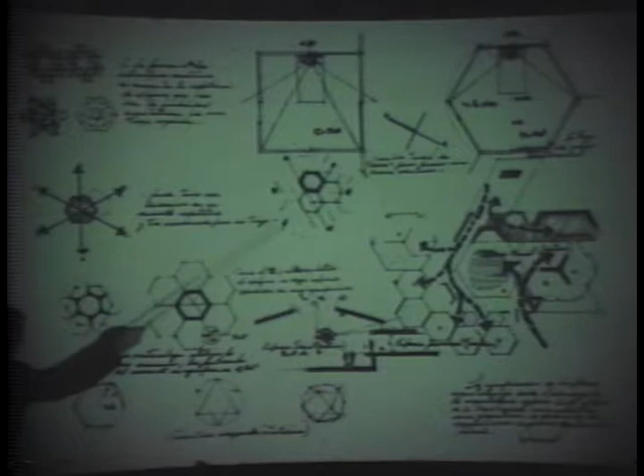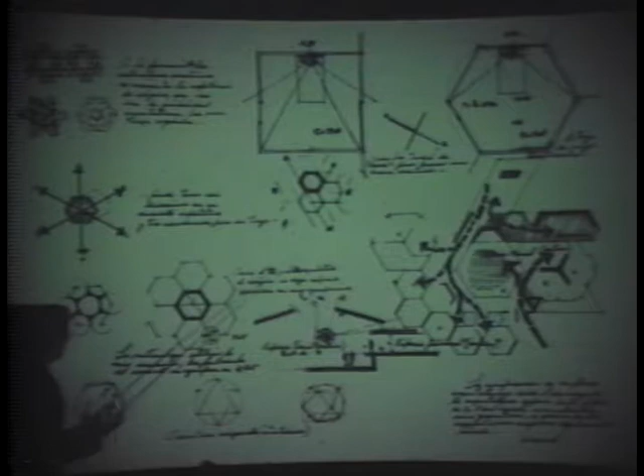This is a comparison of a room with the same surface, and how the hexagon is more wide, it looks more ample because it's more wide and has more length, more profound. The hexagon has 3 lines, 3 directions to move in groupings. So it's more organic, and for some problems, it's very useful.

Here are the circles, how they make hexagons when they join together, like the panel of the bees. They were circular millions of years ago, and by compression, they make hexagons. Hexagon is one of the forms, triangular hexagon. It doesn't leave empty spaces like the circle.

This house is all related with models, hexagon models, with a central swimming pool.

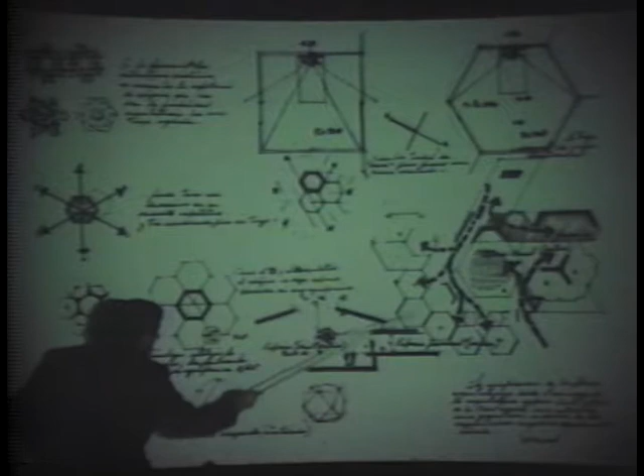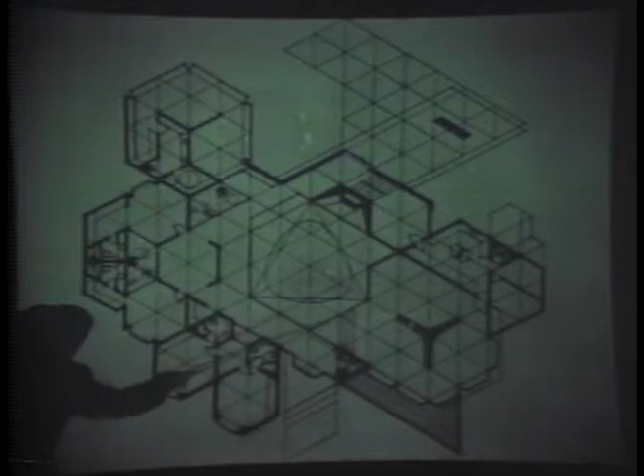This is the plan of the house, all the modulation. This is bedrooms. This is the social section. It has a dome here. And this is the bedrooms of the children, a master bedroom, a kitchen, dining room, and social room.

It's all done with structure iron, structure wood and stone. It has 3 levels of roofs to see the outside garden of a park. The garage. This is the swimming pool. This is another level of communication for the bedrooms. This is another window, another kind of level, and the dome.

The next house is very particular. It's a man who asked for a competition for a house. He asked 4 architects for a project. And he invited me first, we had a talk.

This man said, you want a drink? And he sat down this way, with a drink like this. I was very surprised looking at him walking. After 2 drinks, he walks that way. And I presented him a project.

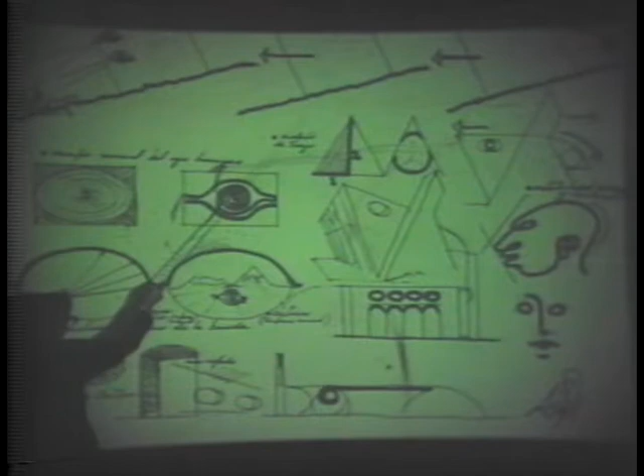And in this trace it has arcs and elliptic windows, because the elliptic window is really the window more functional for the eye. We don't see in the square, no. Our visual field is ellipse, the polychromatic visual field.

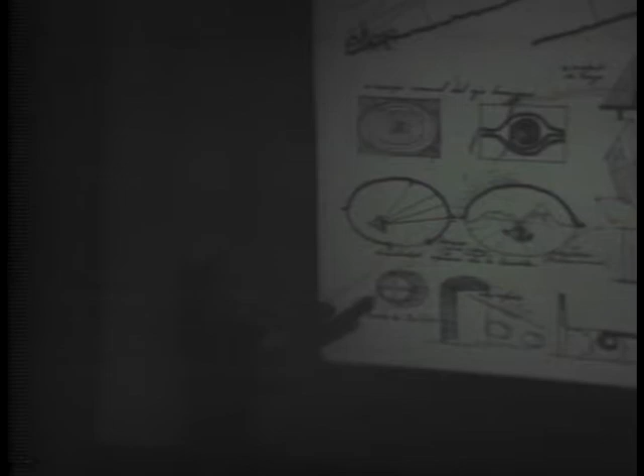And it has all in the triangles, has arcs, which have two dualities. If you see an arc like this, it's a cover, it's covering you. It's a passive way to have a look of an arc. If you look at the arc this way, it's active, it's a shoot for a space.

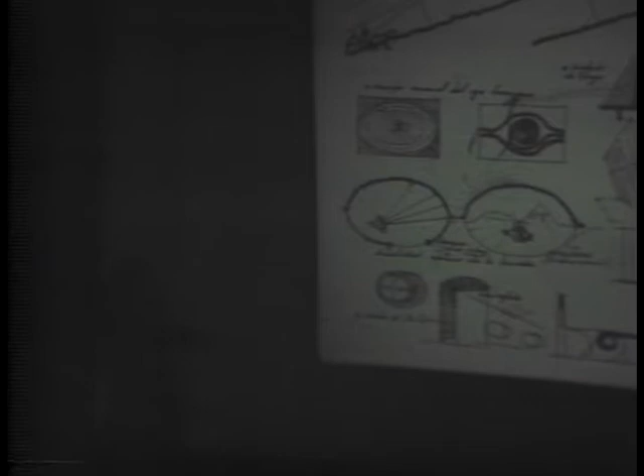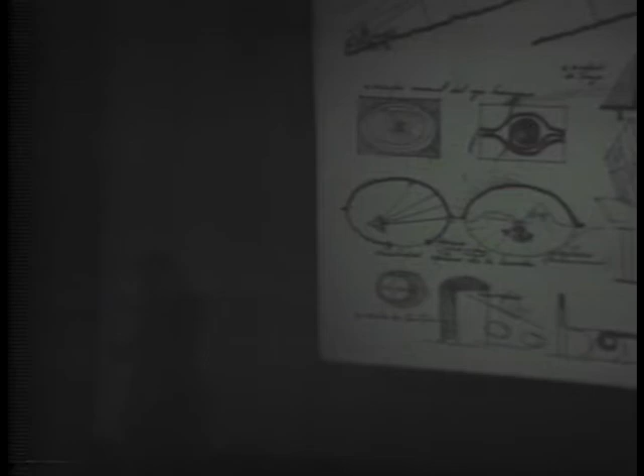These are forms of a convent when it has, I don't know what you call arcos reglados, arcs going from direct, like this, but I will show you later. And the profile of a man and the profile of the house remind me of something I should tell you.

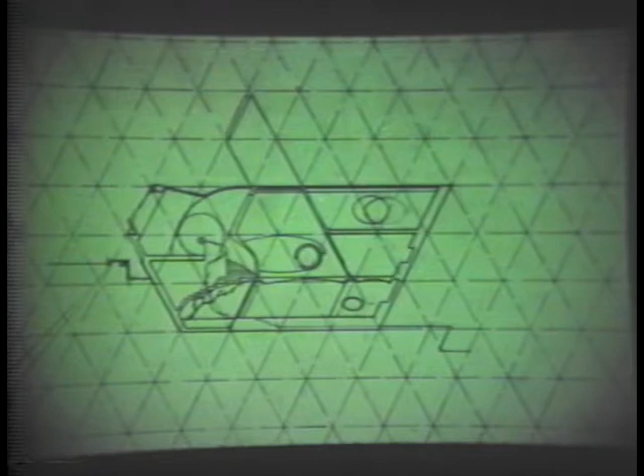Now, this is the section of the house, all traced in triangles. This is the street, one level. This is the entrance. You go down half a level to the reception room, and half a level to the bedrooms.

I believe that all architecture has to be modulated and has to be geometric. I think architecture has to be geometry, pure geometry and mathematics.

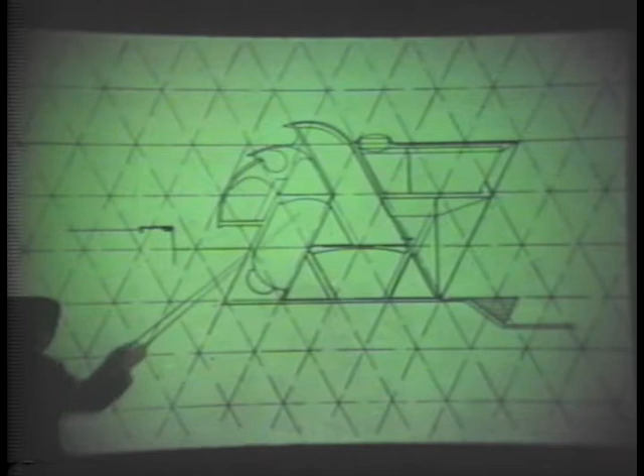It is another section of the house where the circulation is all right. It's a big space of a dining room here, like a chimney of a convent, and the bedrooms. You have to see the... no, what happened?

I don't know why, but in this house a lot of psychoanalysts came to see it. There are two kinds of psychoanalysts in Mexico, the Freudians and the Fromm followers. Fromm and Freud, no? The Fromm followers are more romantic, and the Freudians are more scientific. The Freudian says that this house is very erotic, that he sees sex in every place. What happened with this sex? And the Fromm followers say more poetic things.

I have experience with little boys. When you make something different, the little boys are the most interested people because they don't have vices or fixed forms. They come to this house like to be in Disneylandia.

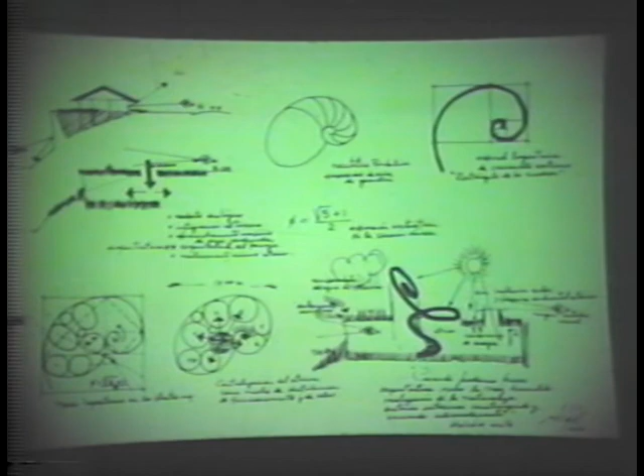When we make humble architecture, we're actually doing honor to nature and living adequately. Okay, this is the plan of the house.

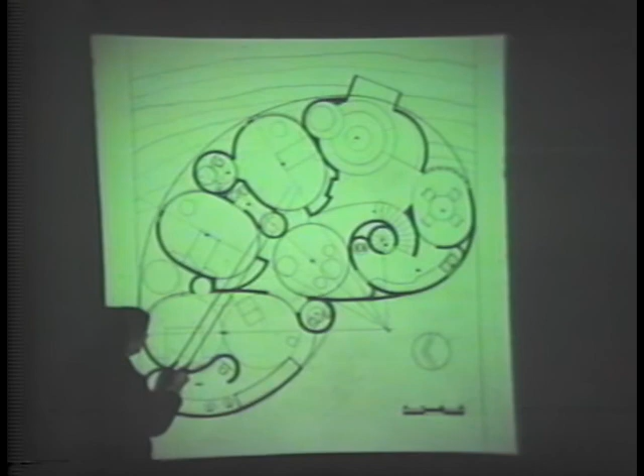This is the service stair to go to the kitchen from the entrance, which is at the top. This is the stairs. This is the living room, dining room. You can see one room and another room, and you can see the traces of 15 and 15 degrees and 30 degrees, and the mathematics of the growing of the house.

One visitor, I was there, he says, 'Is this house for—how do you say enanos?' 'Is this a house for pigeons?' No, that's not how you say it. 'Midgets,' that's right. This is done for the atrium, and I have here a rain collector for a tank.

I have a collector, drains that collect into a deposit of water to keep, and you know something, it's very important—if we make houses like this, we can lower the temperature of a city by about 5 degrees.